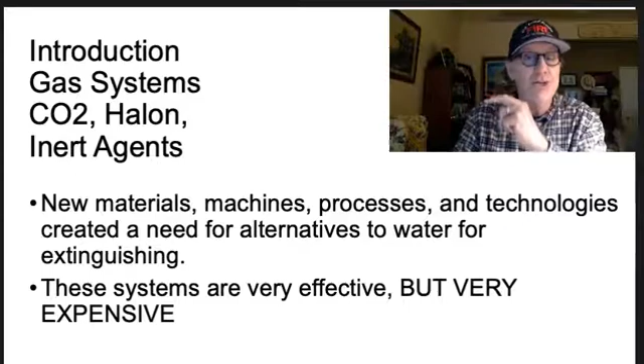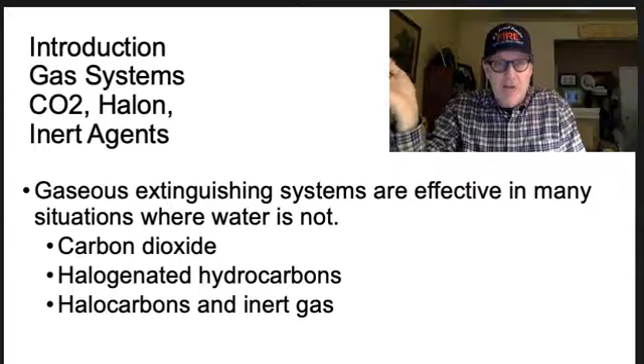This particular video is just going to be about CO2 systems. The next video is going to be halon agents, inert agents, and aerosol products. CO2 agents are one of the main ones - carbon dioxide, halogenated hydrocarbons, and inert gases - and they're very, very effective. Water, a sprinkler system, is way cheaper to put together, but gas systems are way better in effectiveness, though way higher in price. So we're going to go with one of these when we need them.

Carbon dioxide is an odorless, colorless, non-combustible gas.

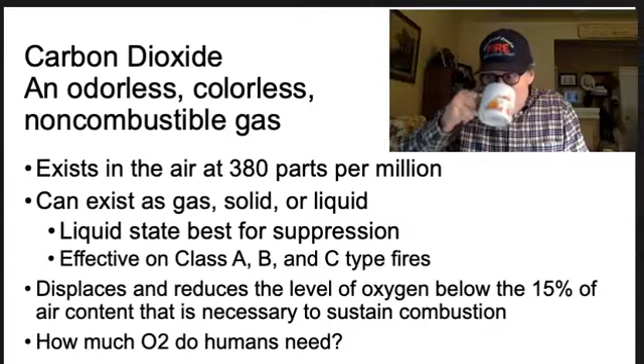Hey, can I take a sip? My allergies are getting to me a little bit, so I got a little tickle in my throat.

CO2 is all around us. It's in the air, about 380 parts per million. It's in our atmosphere, so it's a common gas, but they make it for industrial uses. I'm sure some of you are paintballers and you've got a gun driven by a little CO2 capsule. There are all sorts of uses for carbon dioxide.

It exists both like water, one of the few products that can be a gas, a solid, or a liquid. To get it into a liquid state, they compress it into a cylinder. If the cylinder doesn't have a lid on it, it just dissipates and next thing you know it's gone. So they compress it into cylinders and tanks. The liquid state is best for our application for firefighting, for suppression. They store it in these cylinders or tanks in a liquid state, but when it comes out, it turns into gas.

It's very effective on A, B, and C-type fires - great as long as it's not conductive. With C-type fires, carbon dioxide is not conductive. It can work on flammable liquids. A lot of the special effects people I work with in the film industry like to use CO2 a lot - they have CO2 extinguishers.

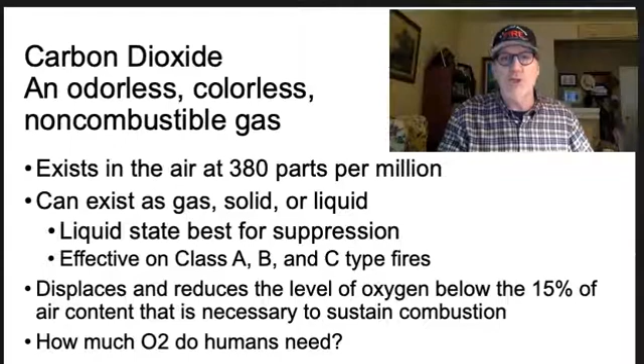Like I said, it's 50% heavier than air, and it separates the oxygen from the fuel, thus extinguishing the fire. And when it's discharged, it goes from that liquid state and expands to a vapor state, and it can fill the area or fill a room.

So now why, when CO2 is released, does it have a cloud? Well, it's cold, and it comes out cold, and moisture is attracted to it, so it mixes with moisture, and that's why you see a cloud. Now sometimes the cloud aspect, the moisture aspect to it, goes away, but that doesn't mean the CO2 is gone.

So you should always use some kind of an oxygen meter before returning into the room, or be wearing an air bottle, an SCBA of some kind, after an activation has happened.

CO2 is used when other agents like water or wet chem or dry chem would be a problem or not effective. Sometimes you need something that's going to envelop a piece of equipment. CO2 is used a lot for printing rooms, so they want it to work all the way around the system.

Dry chem, you think, well, why not dry chem? It kind of envelops the area. Well, the particles in the dry chem are really bad for electronics.

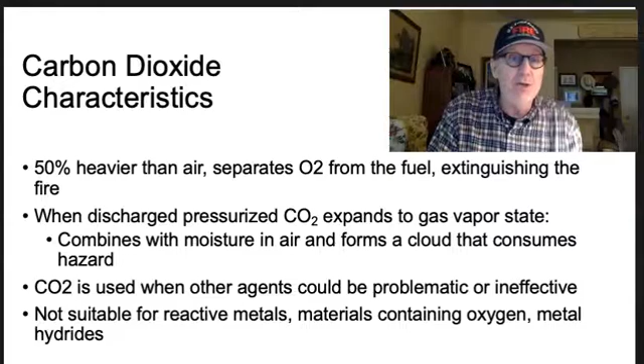So the one thing it's not suitable for is reactive metals, materials containing oxygen, metal hydrides. So these systems are engineered to be specific to the equipment or the process or the things that it's protecting.

They're self-contained. Like we saw with wet chem and dry chem, all of these systems have similar properties to them. We have a cylinder or a tank, it goes through piping to where the equipment is or the room is. And then with CO2, one thing that's unique is some of the times we have these manual hose reels where they can take and use it like a water hose and go to where the problem is with the hose reel and spray it on the piece of equipment that's needed.

That's just for manual uses. If not, there'll be fixed nozzles which shoot it down on the equipment and delivers the agent. So either a manual hose reel or a fixed nozzle. All equipment, though, has to be listed or approved with companies like UL or FM, Factory Mutual.

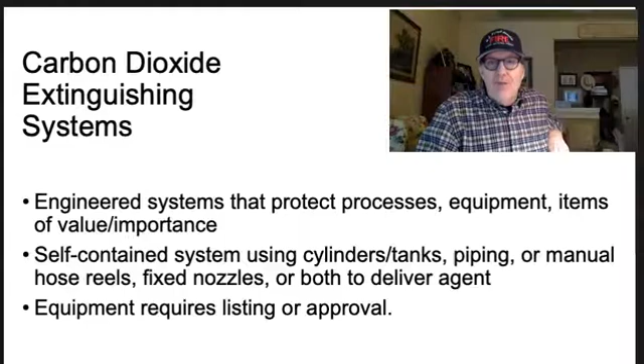There's a few types of systems and methods that exist, and they depend on the hazard and the amount of agent that's needed as to which system they're going to have. There's lots of different nozzles, used like we saw with wet chems in kitchens, there's different nozzles for different situations. If you have one that needs to be directed right onto something, that's different than one that fills a whole room.

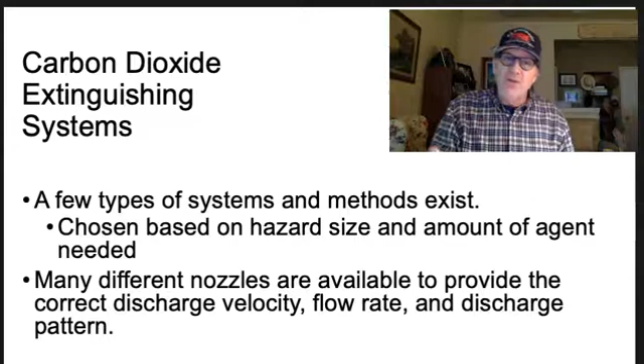So they have different flow rates, different discharge patterns. The discharge nozzles have to withstand heat and the pressure in the CO2 system. You might remember CO2 is sometimes used as the gas to expel a dry chem or wet chem product, and it helps choke the oxygen, but it's being used to push it out. With CO2 alone you don't need that, because it's already pressurized - as soon as it opens up, it starts shooting out. The pipe and nozzles have to handle that pressure. They usually have blow-off caps or frangible discs that pop off, there to keep it from getting clogged by products in the area.

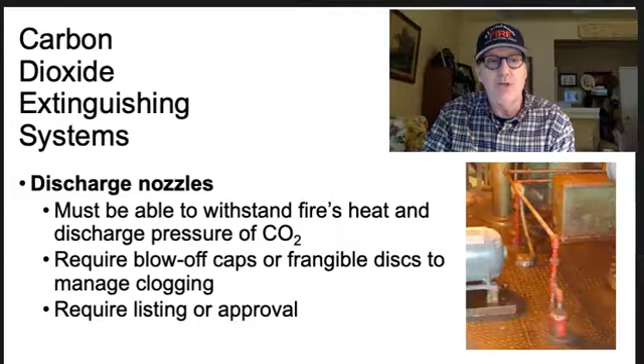Again, they all require listing and approval. How is it activated? Usually it's an automatic detection system tied into the alarms, or it might be a manual pull - when a person pulls it, the alarm turns on and the fire alarm control panel sends a message to the CO2 system to turn on. These have to have warning signs posted about the dangers and give emergency instructions.

With all the systems we're going to talk about today, there's a pre-alarm to the alarm. The first alarm is, hey, my system's going to turn on, and it's warning them because sometimes they have an abort switch. If the system is turning on when it's not needed, it's not a fire, but it detected something incorrectly or a glitch in the system, there's a way to turn it off and keep it from happening.

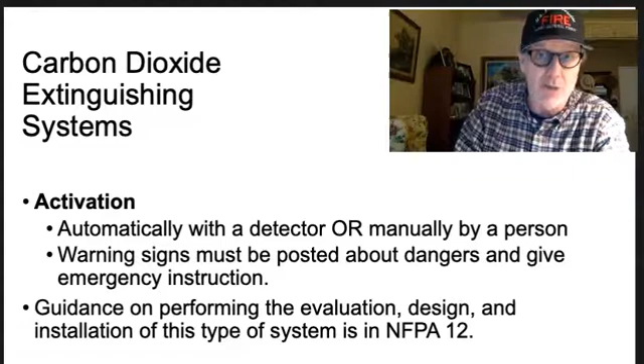So I mentioned there's different kinds - low and high pressure. The low pressure is usually stored at about 300 psi. The high pressure systems are up at 850 psi, so they're going to come out with enormous velocity. Both systems dispel the gas without any additional propellant, and the system is chosen by the engineer who designs it based on the kind of hazard, the amount of CO2 needed, and the standards in NFPA 12.

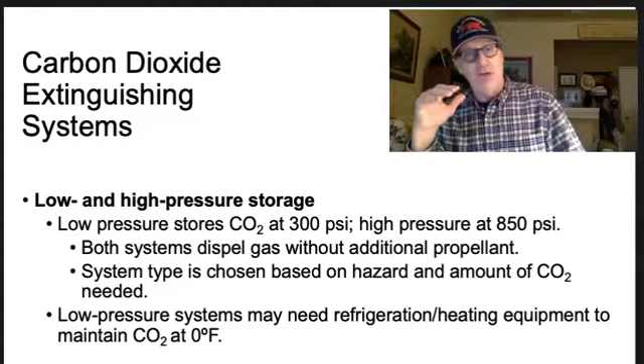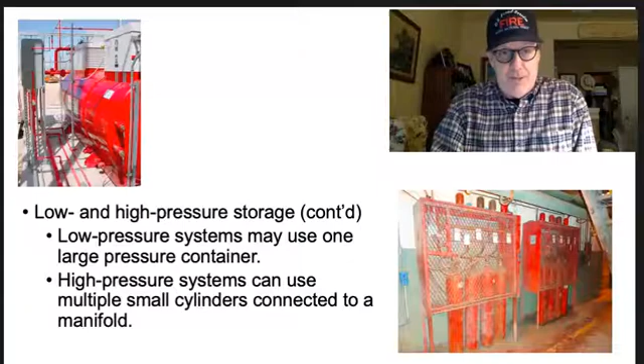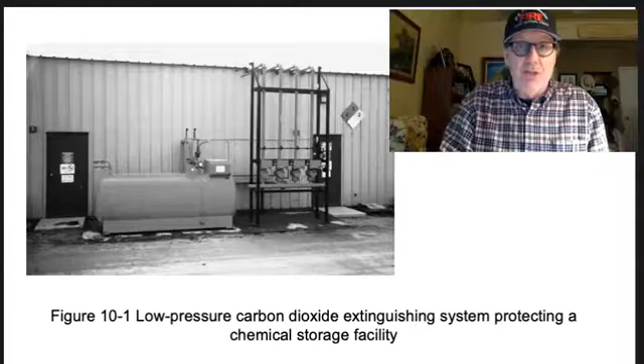Low pressure systems can use one large pressure container, and high pressure systems usually use multiple small cylinders connected to a manifold, like you see in the bottom right picture. Here's a low pressure tank outside a building where it protects a chemical storage facility, and you can see all the piping. It goes from that tank into the piping, comes out at the appropriate pressure based on the manifolds and the way it distributes it, and goes to where it's needed. Whether it fills a room or sprays down on a piece of equipment depends on the situation.

Now, the automatic delivery systems usually protect a specific area, a piece of equipment, a particular process or operation, and it detects a problem in the equipment - a heat detector, a smoke detector, some kind of detector - and then it turns it on. Total flooding systems are going to fill a whole room. All of these systems we're going to talk about have one or the other, or both - this one can do both.

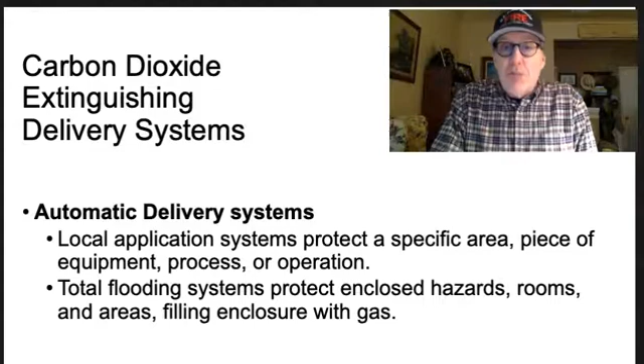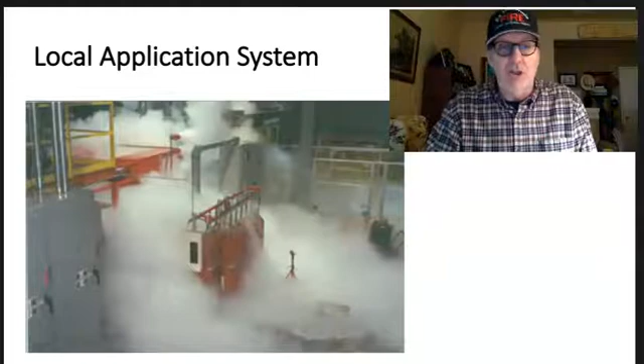Now there's manual delivery systems that aren't automatic, and in these systems there's a hand hose line, or some are on carts, some are on hose reels. Usually there's a standpipe throughout the whole building. Sometimes that standpipe doesn't have stuff in it, but a vehicle has to pull up, connect to it, charge it with CO2, and then it comes out one of these hose reels or carts. It's used just like an extinguisher, but with a hose line, like in standpipes when we talked about Class II systems where the hose and nozzle are already there, you just pull it out, turn it on, and it comes out. That's the same here.

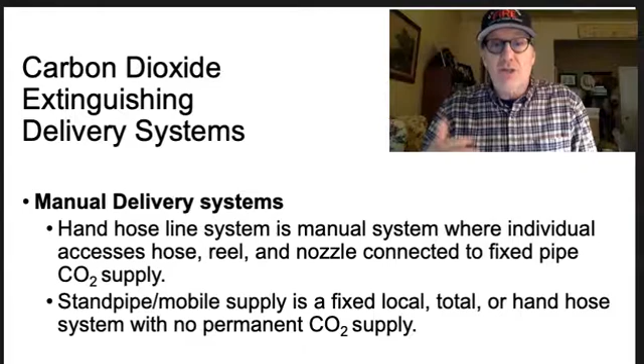Let me show you a picture, a hand hose system. This is one like in a manufacturing plant where this might be in a central location, and if they have an issue with one of the pieces of equipment, they run over, wheel this up to the piece of equipment, it's full of CO2, they turn it on, and spray the CO2 on the equipment.

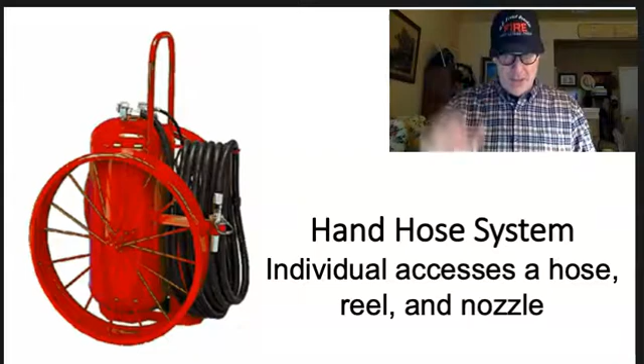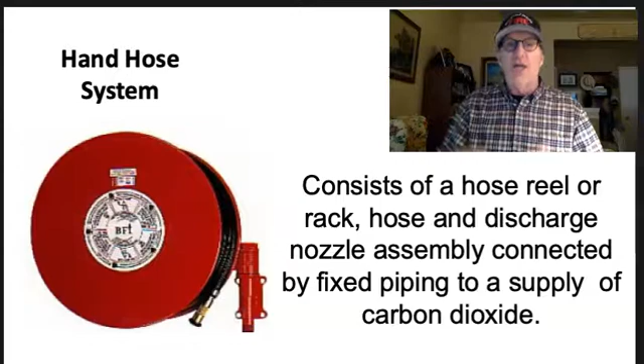Here's a hose reel type, and this consists of a hose reel, a rack, hose and discharge, and again it's connected to fixed piping to supply the carbon dioxide. For these industrial facilities, most of the time everybody's got to be trained to use these. The standpipe system might be tied into tanks already, but like I said, the CO2 oftentimes in these is supplied on a vehicle that pulls up to the building.

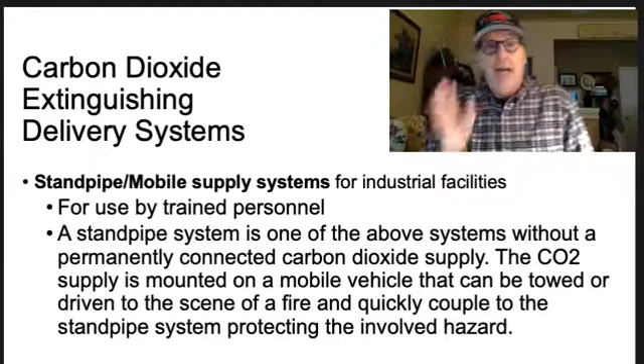So let's say a place like Lockheed or Boeing, where they have a whole bunch of different facilities with all this equipment. They have the standpipe set up, the hose reels set up, everything's pre-set up, but they have a vehicle that goes to wherever there might be a fire, connects to the standpipe, so they don't have to have tanks at every single one—they just have it in a vehicle. They connect, just like a standpipe, to a fire department connection that shoots the CO2 into the system, fills the standpipe, and then it comes out the nozzles when they need it. Kind of different.

Well, what about these systems? When we're building them, they've got to be inspected. The plumbing has to be inspected. The engineer is going to turn in the plans to a fire prevention inspector, who will make sure that everything is done according to the California Fire Code and NFPA 12, the standard. Then once it gets installed, another inspector has to come out and watch a demonstration, so it has to be proven that it works. Then they're going to have standards that they've got to stick to.

So they're going to have visual operational discharges when they install it, but then also periodically throughout the life of the system. When the system is operational, they've got to do weekly and monthly inspections to make sure that everything's in good condition, and check if there are any hazards or issues. Sometimes the rubber hose starts to get corroded and starts cracking. So if there's any signs of damage to the system or any signs of leaks, all of these things need to be visually inspected and then sometimes operated to inspect, and they keep records of that.